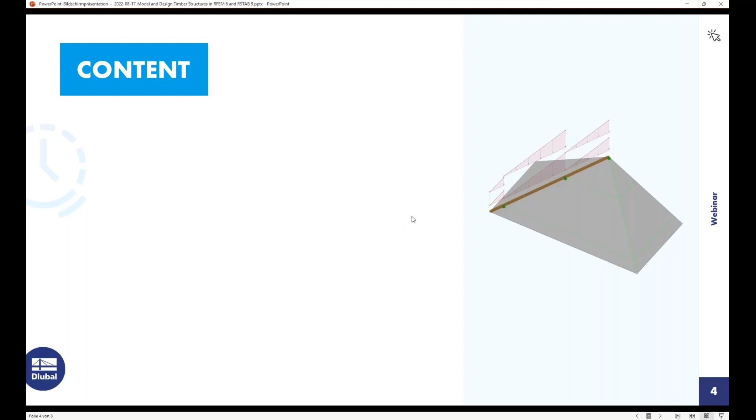But let's go to the agenda today. So we will model a hip rafter for this hip roof, or a part of a hip roof. I will not model the whole roof because of time. But don't get me wrong, I don't want to present you how to design, in this case, a two-span beam with a cantilever.

That's actually not the aim. The aim is, of course, loading. How do we get the loads on this beam, when we talk about the tributary area? That's maybe not so easy, or not so well known, how to get tributary areas for this kind of beam. And that's one big issue.

And of course, we will design the component, in this case the hip rafter. We will spend a bigger focus today on the printout report. In the last webinars, for the design add-ons like steel, concrete, and so on, we did not spend so much time with it. Today I want to spend a bigger focus on it.

So because this was always asked, let's see. The aim is to get a really small documentation with all necessary inputs, without creating hundreds of pages, for example.

The reason I show you topics 1 through 4 is topic 5, which is about parameterization, blocks, and scripting. The aim is to give you an environment where you can use this beam or this kind of beam easily, and repeat the input with parametrization, entering just a few values like length and inclination, to get results really quick. This is the big aim.

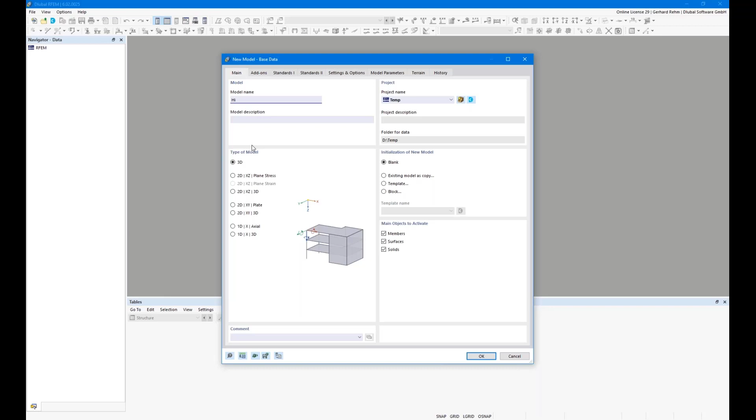And I will activate the add-on Timber Design. I don't need the load wizard because I will apply the loads manually. We can select the standards. In this case, I select Eurocode 0 plus the SLS combinations for timber.

I'll leave it for the global Eurocode, but of course you have plenty of national annexes as well. We'll leave it with the global Eurocode. That's actually all for now, and then let's create this hip rafter.

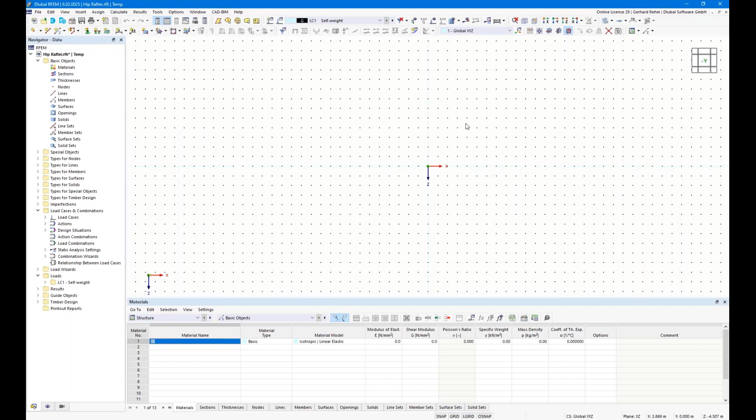All right, so the normal roof should have an inclination of 30 degrees, and let's create the beam. I use this tool, length and direction, and select this line with a length of 10 meters. I need to change this angle to 120 degrees to get an inclination of 30 degrees. All right, here we go.

Now I need to create a cantilever and the spans in between, so I will divide this line. You see there is already a shortcut for this option defined. You can define shortcuts under View, Customize Menu and Toolbars, find the correct tool, and apply the shortcut by double-clicking it.

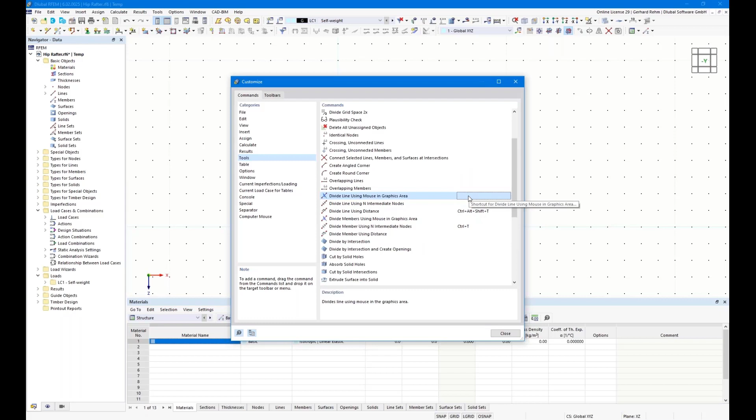I hit my shortcut for it, and I will divide it for the cantilever by 0.8 meters, with a true length or projected length of 0.8 meters. Again, the half length or half width of the building should be 6 meters, so I will enter 6 meters here.

I will add another purlin, the same as we see here on the screen. So we have a purlin here on the bottom, or a ring beam for example, and here we will have another purlin, or maybe walls. It depends on the construction, of course. So I will divide the line again at 3.50 meters.

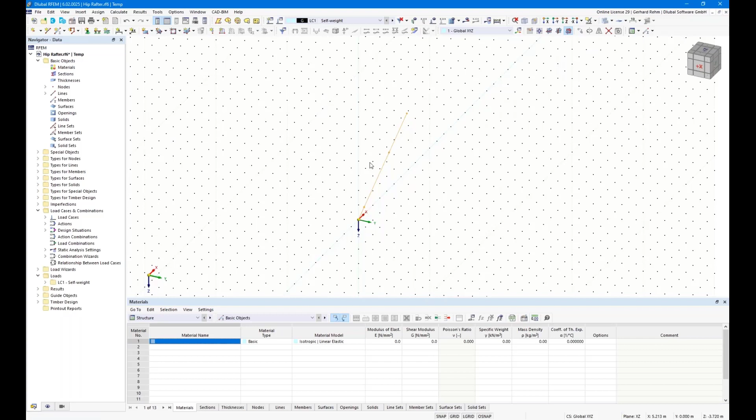All right, so that's it for one roof side. Now I will create this hip rafter. We choose the same inclination on both roof sides, so in this case it's easy. There are more options to create this hip rafter, but I can only show one.

Let's create a copy at a distance of 10 meters. I use this option, step links, and can directly add lines in between the nodes. I will rotate it by 90 degrees, or minus 90 degrees, around the apex, and copy and move these lines by minus 10 meters.

That's it actually. Now I will use the connect tool, which is over here, and connect all the lines. I can delete the unnecessary lines and nodes again. Switch off the grid, and now you can directly draw this line, which represents the hip rafter.

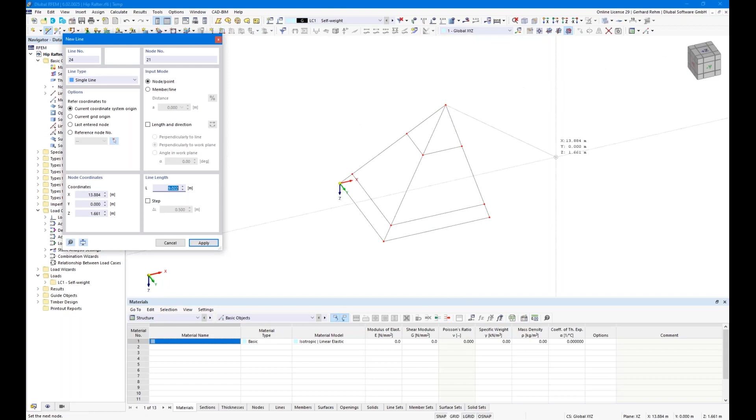All right, we will mirror everything. The mirror plane is in the YZ direction, in the YZ plane, and point B is exactly here in the apex. So we don't need this line, this line, and this line, and also not the nodes, so I will delete them.

Okay, so let's define the rafter. We can use the tool here, create new single member, or we can just select the lines, and I will activate the member option, and now I can assign a cross section and a material. Let's start with the cross section.

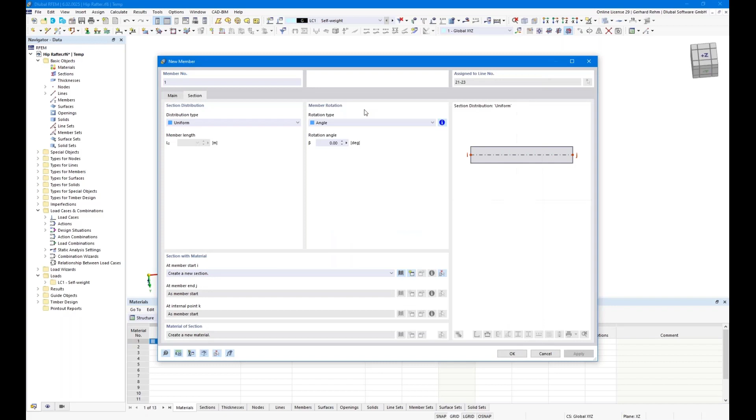In this case, the minimum height of the hip rafter depends on the jack rafters. Let's say the jack rafters have a height of 20 centimeters, and because of the inclination of 30 degrees, it's 20 divided by cosine 30 degrees, so the minimum height is at least 23 centimeters. Let's start with 24 centimeters height. But of course this is not the full truth.

When you think about some notches like the bird's mouth cut, or the cuts on the top side, there are also different sections here on the bottom, but we will come to this later. First we start with a simple rectangular beam.

All right, so let's start with 100 by 240, and let's assign a material. In this case you can use the filter, or just enter your material directly in this search function. I can select this material GL24H according to EN 14080. All right, so that's it so far.

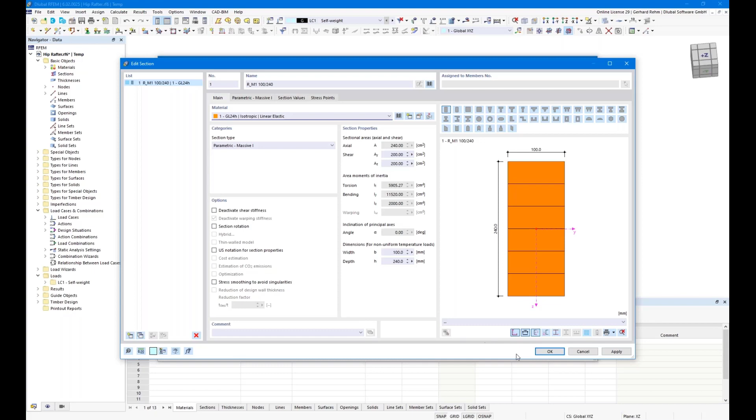I just hit the OK button, and now I have this beam. I don't want to have the beam also here because it's symmetric. I just added this to the structure to show you what is possible with the loads and so on for later. Then of course we have the beam, we need support.

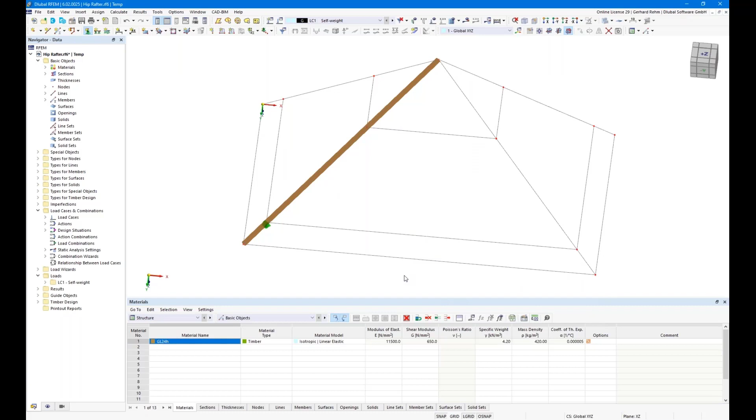So I create just two nodal supports. Of course I need to rotate the supports by minus 45 degrees in this example. So I fix the support on the bottom and a sliding support here on the top side. New one: minus 45 degrees, and it should be sliding in the X direction.

So here we go, we have the model. And now we need the loads, and that's the question now: how do we get the loads on this hip rafter without modeling each jack rafter. That's the aim in this example.

Of course I can add the jack rafters, but then I need to take care of the restraints here on the bottom side. The full load in this case should go to the hip rafter for the design, and if I apply a fixed support here, maybe there is a restraint, and then the hip rafter will not get the full load.

And of course, it's more complicated and time consuming to create all these jack rafters and so on. I want to show you an example today of how it works without that.

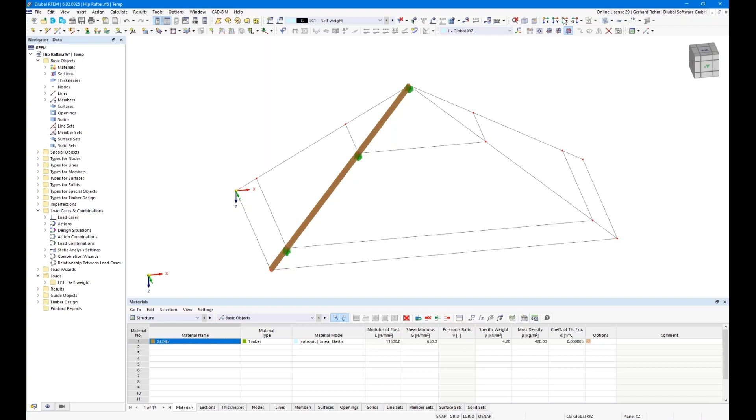Let's create a screenshot first, and let's talk about the tributary area for this hip rafter. When we think about the classic hand calculation, how we did it in the past or how we still do it, we have to think about what is the tributary area.

Let's focus here on this second span. I'll create a copy of this, and I have these two points or nodes here, which is exactly in the middle. So it's just geometrically, we have no continuous effect, it's just the basic. How do we get it? We get it by dividing by 50% of the span length.

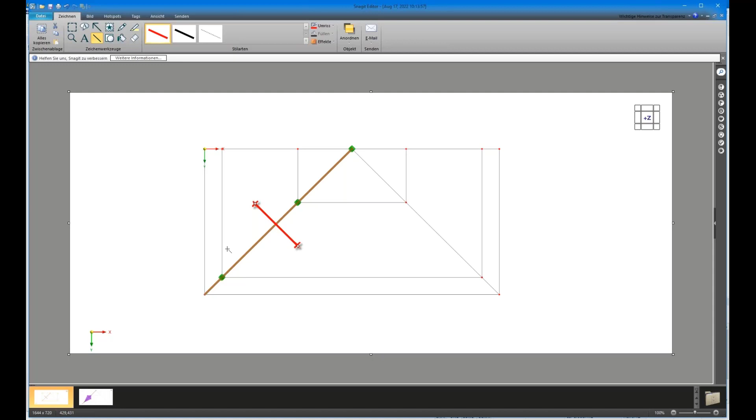But of course, I don't want to do this always manually by hand, by measuring something. This should be done automatically in the software, and I will show you how to do this. So the question is only how.

Maybe you know about this option, which was also available in RFEM 5: member loads from area load. Maybe we can check this out. What we need to do is define a load magnitude in kilonewton per square meter, define a plane, and load members. But of course, I don't have members here because the whole load should not be covered only by the hip rafter. It should also be covered by the purlins or walls. And it's only possible for members.

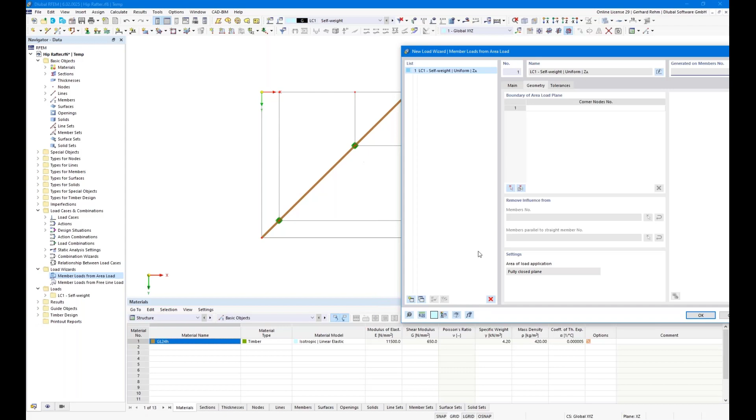Of course I could create here a kind of pseudo member to get the correct distribution. But another disadvantage with this member load from area is that it's actually an isotropic load distribution. So we don't have the option to say the load should be distributed in global X direction. This is not possible with this option.

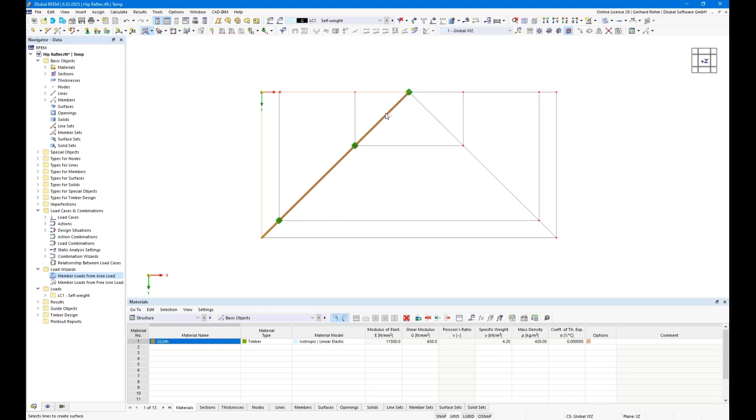So in this case, I have a better option. I create a new surface, and here we have a new surface type called load transfer. What I will do is create this surface now. All right, so now you see we have this surface.

Maybe I will create directly all the others too. Now, where's...

Andreas, is there something? Yeah, we lost a little bit, we lost some seconds. We couldn't hear you, but now it seems to be okay. Oh, sorry, should I repeat something or just continue? Maybe the last two sentences for security. We didn't hear something. Okay, I'm sorry, maybe for 20 seconds also. Okay, good. Thanks for the information.

So we are looking to apply the loads here in Y direction. That's why we check the axis system, and here we have the option to define the load transfer direction. In this case, I want to transfer it in Y direction. Just click OK, and now let's apply a load.

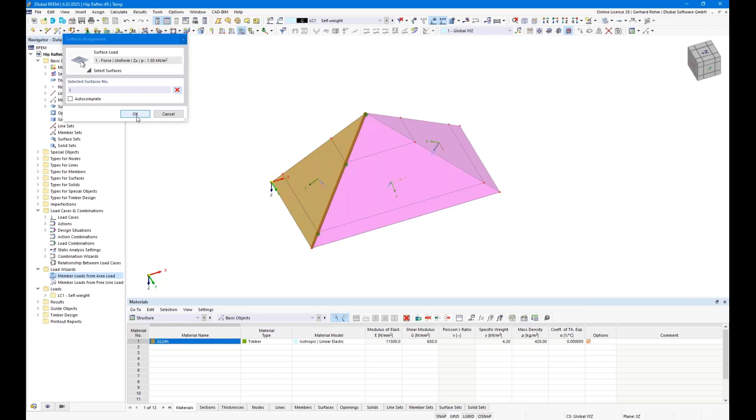You see here our area load, nothing special, but you can check the load directly on the beam as well by right-clicking the surface and selecting display load transfer separately. Now you can see how the load is distributed here. It's constant over the element, but you can change this easily.

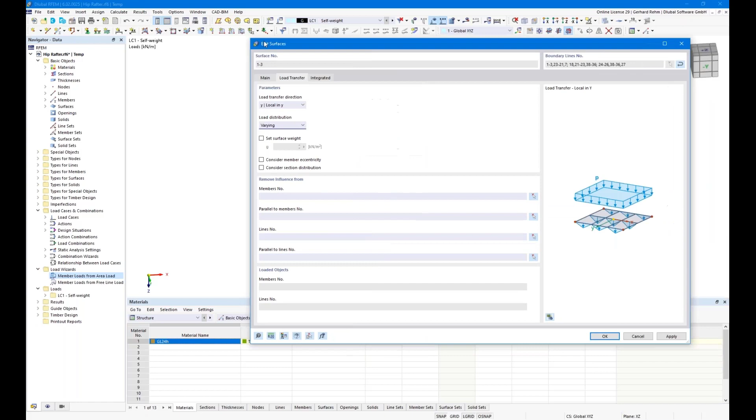Just go again to load transfer and switch this to varying. This will also be the new default setting in the future version, available I guess next week, so varying becomes the default instead of uniform. Just click OK and you see, perfect - it is exactly as expected, but there is no load here on the purlins or on the walls.

Right now the hip rafter is covering the whole load from the whole surface, which is of course not the truth. But how to apply the load also on these lines? When we check the load transfer surface, you see the loaded objects can be members or lines, and that's the big advantage compared to the member loads from area load option. But you see there is no load, and that's clear because there is no stiffness defined on these lines.

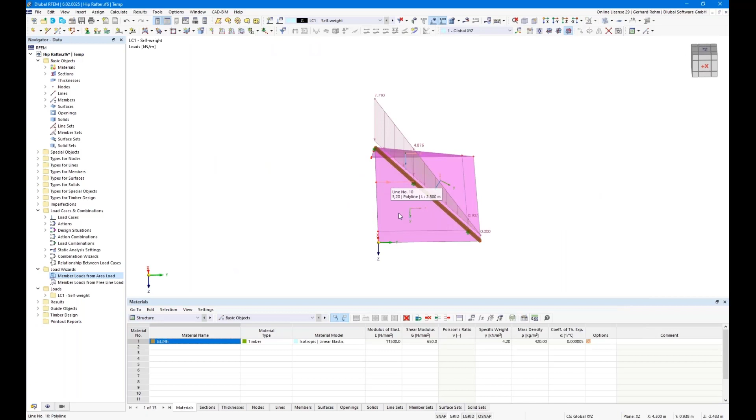So either define a member or just define a line support. Let's do this and you will see directly what's going on. When you apply the line supports, it's directly changing the load distribution as well for the hip rafter. And this is exactly what we are looking for. Also the distribution on the rafter looks really nice, and as I expect.

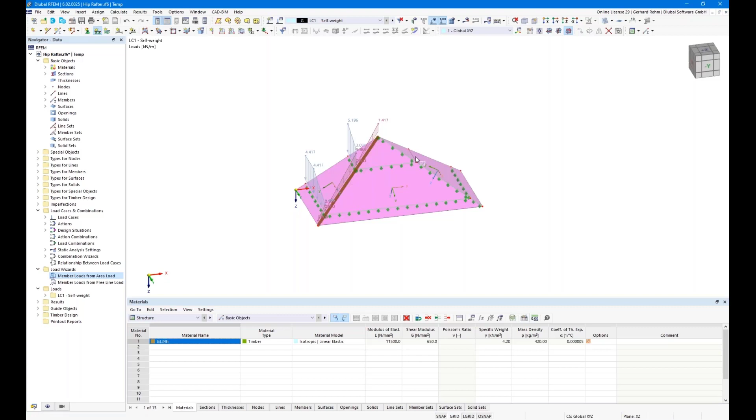We will do the same also on the other surfaces. I need to define a line support everywhere where we have a stiffness. Okay, and now we can apply the load. It's 1.5 kilonewton, I guess we have it already here. Just add 2 and 3.

And that's it. So the big advantage here is you will get directly the loads here on this wall for the further design, or for example, for the purlin. Of course, you can delete the line support here and apply directly another beam and connect it with a hinge, for example, to consider the purlin. You can also consider a column underneath. That's also possible. But of course, for today's presentation, I will just focus on this hip rafter.

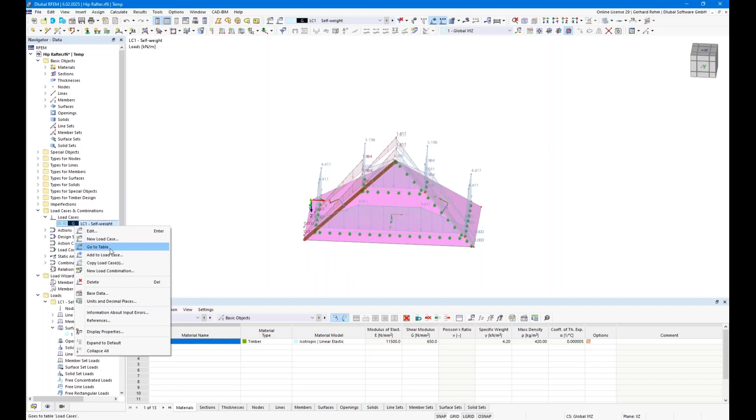All right, so we have defined the loads for load case 1, self weight, and we will create another load case. So I will just copy the load case, copy load case, and let's apply a snow load.

I will deactivate, of course, the self weight, and I will define snow here. Action categories should be snow, less than 1,000 meters. Okay, that's all. So you see directly, depending on the action category, the load duration is set automatically.

We will skip wind loads and so on. It would be too time consuming now, but it's the same. You apply not a global load; in this case, you apply local loads. That's also possible.

All right, then let's go through the load combinatorics. Of course, we have the design situations for ULS and for SLS, and the result of the design situation. Maybe we can select all of them and switch this from second order, from P-delta, to first order, meaning geometrically linear analysis, which is enough in my example.

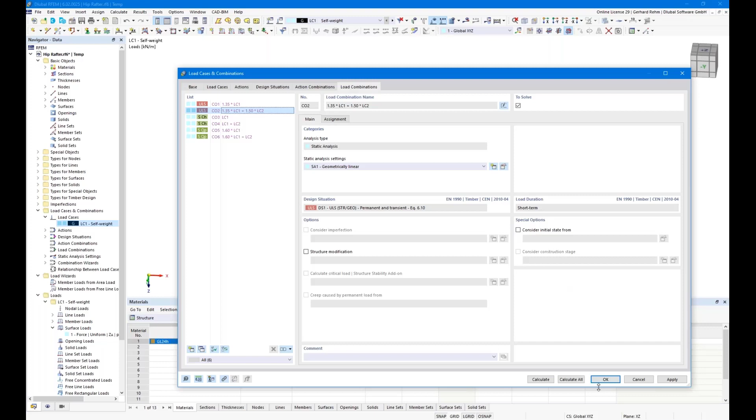Okay, so let's check the load combination. Of course, we get all relevant load combinations, and the related load duration as well for each load combination. Okay, so far for the load combination, and let's focus actually only on this hip rafter.

So I will create a visibility, and I will define some parameters for the design. So we finished with the loading, so now we can focus on the design. So here I have 3 separate members.

I could also model this as 1 member and use intermediate nodes. This is also possible, but in this case, I use 3 separate members, and to bring this back to 1 beam, I create a member set. So we name this hip rafter.

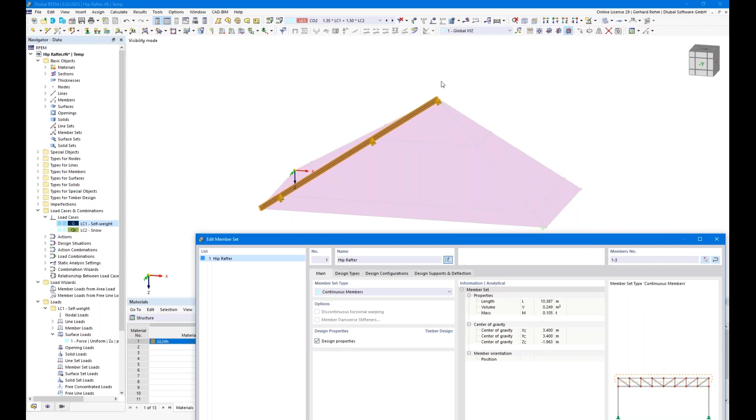And we want to overtake the design properties. So I don't want to have the design properties on each single member. I want to see it on the global, or on the complete member set.

Okay, so let's go to the next tab, design types. So here we define some specific stuff for the design. We have effective lengths. Let's see what's to do here, and let's check it. Okay, so we have to ask ourselves if stability is an issue here in this case.

So when we think about buckling around the Z-axis, we have a lot of jack rafters here, and I can definitely say that buckling around Z-axis is not an issue here, at least when we have jack rafters every 70, 80 centimeters. So I can deactivate buckling around Z-axis.

The same for lateral torsional buckling in this case. There will be no lateral torsional buckling occurring, so it is not controlling in the design, definitely not.

For Y-axis, okay, when you think about the normal forces being really small, I can imagine buckling around Y-axis is also not a big deal, but let's define the parameters for it to show you how it works. Okay, so in this tab you see we have the support types, and we have one support on start and one on the end. This is the default setting.

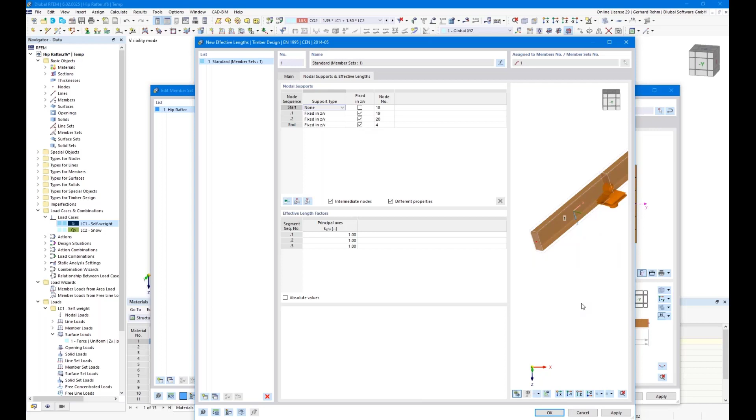But of course, we have these intermediate nodes, so I will insert this intermediate node. So we have 2 intermediate nodes, and we have it fixed in Z direction, around Y direction. But here on the cantilever start, I have no support. So you can see here, these are my buckling lengths. We have one for the cantilever, one for the first span, and another one for the second span.

Which can be modified, of course. For the cantilever, maybe we can set this directly to no buckling, since there will be no compression force in this rafter, in this cantilever. Okay, so that's it so far for the effective lengths for the design. So the next step is about design configurations.

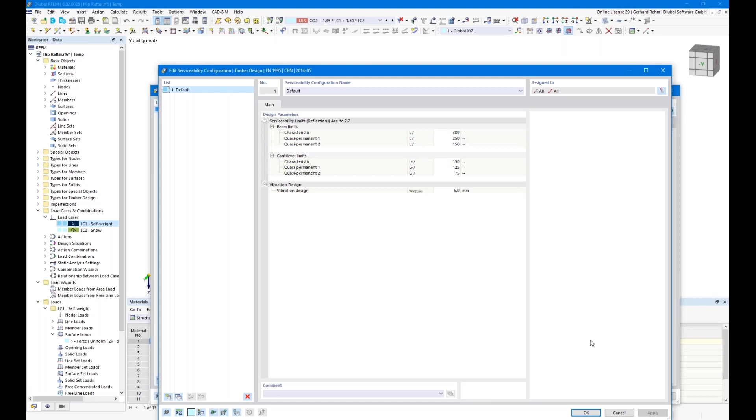Maybe let's have a look inside. Nothing special. Maybe we can neglect some forces, maybe as a result of P delta analysis. We want to ignore some internal forces. This can be set here, or some additional setting which I don't want to explain in detail now. The same for the SLS. Here we have our limits defined, L over 300 for characteristic, and so on. Okay, fire is the same, but we don't focus on fire today.

Okay, so the next tab is important for serviceability. As you can see here, we need a reference length for the serviceability. The reference length should be, of course, per span. As you can see here now, we have only one span. So if we would leave this as it is, it would consider the whole length of the beam as reference length. In this case, it's 10 meter 38 over 300, for example. This is, of course, not the wished behavior.

How can we control this? We can control it by using these design supports. So maybe just hit the F1 button, and then the manual is loaded, and you will see here what is actually the function of a design support. The first function is the definition of boundary conditions for the design pressure perpendicular to the grain direction, which was implemented in RFEM 6, and the segmentation of the members or set of members for the deflection analysis.

Okay, so we need to define design supports to get the segmentation. In this case, for the member set start, which is here, we don't need a support, but for the end, we need one. So I created it here, and you can see we can enter a support length and this KC90 factor for the design check of compression perpendicular to the grain. But I must say it was implemented for this typical straight beam solution.

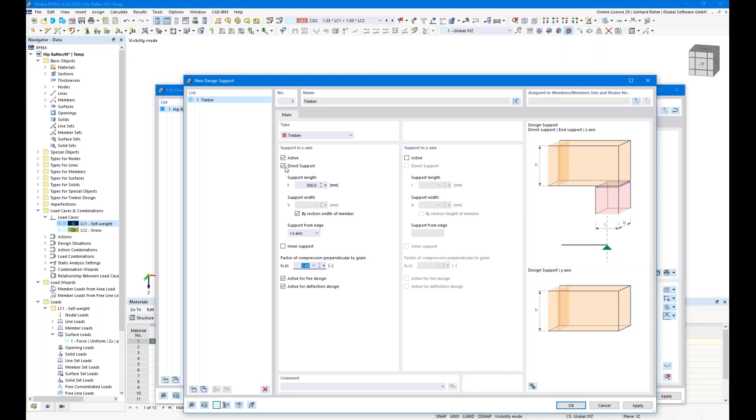When we think about this bird's mouth cut in the cantilever, it is not possible right now to consider this notch. So therefore, we will use the design supports here now only for the serviceability. That's why we set this to direct support, though we have no inputs for that.

Okay, so here we go. We will add this design support also on the intermediate nodes, and we check only the deformation in local z direction. And here you can see our segment length. So we have one segment for the cantilever, the next one for this, and the next one for this. These values are used for determining the reference lengths.

Okay, so that's it so far. Just hit the OK button, and we will also see these design supports here. We can directly deactivate this design support since they are not important anymore for me. Types for members, design supports, and maybe member sets is not important for me. All right.

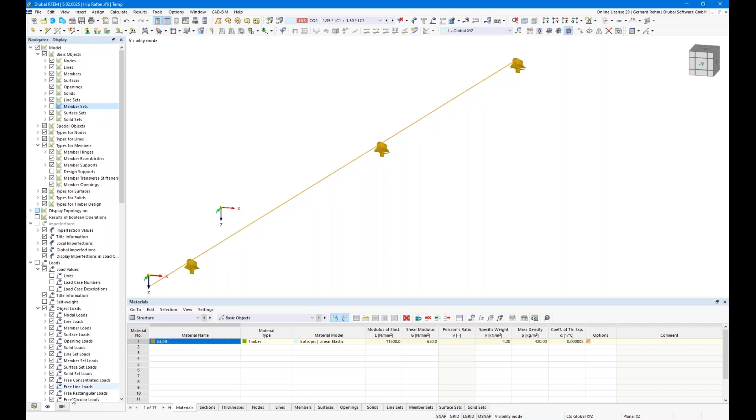Good, that's it actually. Maybe I forgot one thing because of the loads. Of course, I have copied load case 1, which means we need to change the load for snow load. Let's apply 2 kilonewton per square meter, and the load direction should be, of course, projected. All right.

So when we check the loads, do not wonder why the load is here displayed also for snow on the true length of the beam. This is a kind of specialty in these load transfer surfaces. They can only deal with loads and project them in the true length of the beam.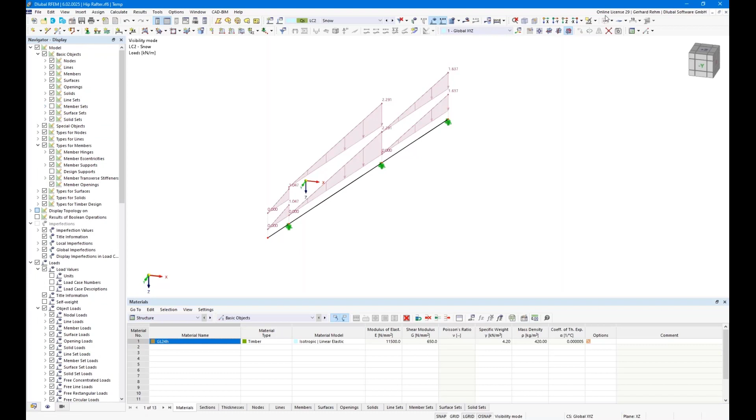So when we check it separately again, wait a minute. Here we go, you see the loads are applied. Sorry, the loads are applied in the projected area, but the internal process converted automatically to the true length. So you must imagine it's a kind of umbrella. When you flip the umbrella, it gathers all raindrops. It does not matter in which direction, whether it's gravity direction, or a kind of mix of gravity and lateral direction.

So the loads are always displayed in the true length direction. Okay, but it's converted correctly, of course.

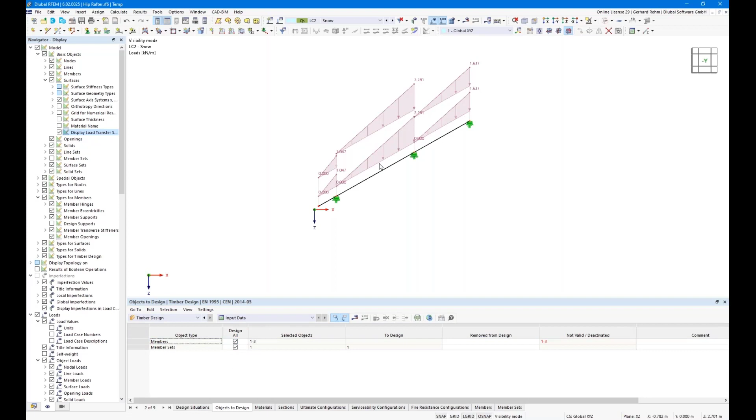Okay, so let's focus on the design. We have defined all parameters for the design. We will check this one, so we want to check ULS and SLS. I want to design not the members because I have no inputs for the members, so I have to activate this option because I want to design the members via the parent member set. Okay, I will deactivate this, and that's actually all for now.

We can directly run the analysis.

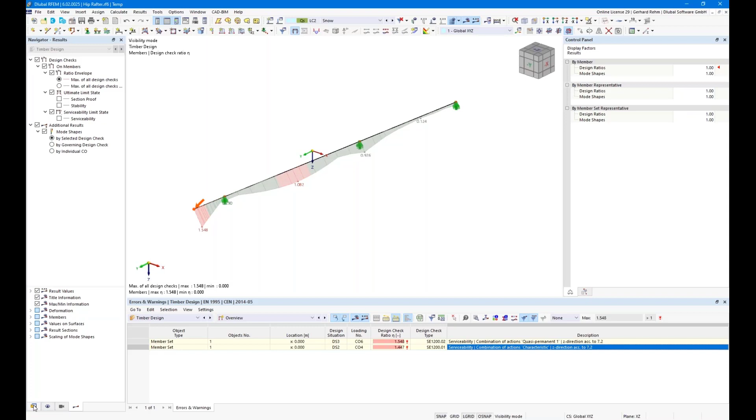But in reality you will not check this deformation on this cantilever. That's why you have the option here, member sets, to deactivate it. When you deactivate this option, no design check is done for the cantilever, and this is the option I want to choose here.

Also, because of the first span, the deformation was a bit too high, so maybe I'll change this to 120 millimeter. So let's run the analysis again. Of course we have changed the cross section, so we need to rerun the analysis for all load cases, or in this case load combinations, and of course the timber design.

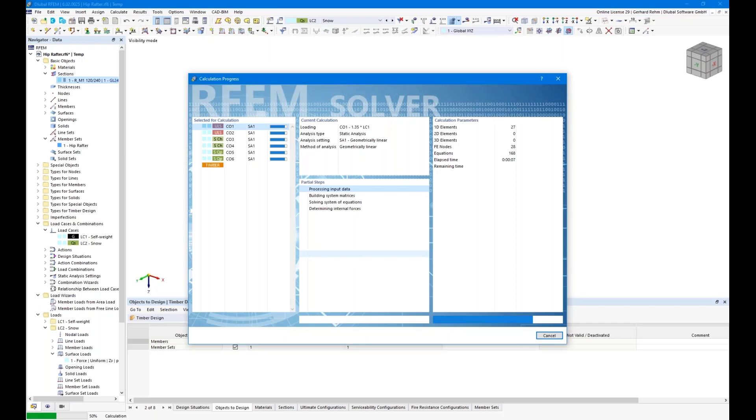All right, perfect, so that's our design. I don't spend time now to present you the internal forces and so on, I guess that's clear to everyone.

Let's have a small look at the design, directly design by member set. Here you can see all designs. There are a few zero values from neglectable internal forces or deformation, but you can define a small filter, show only something bigger than 1%, for example, and then you see all design ratios which are done.

So we have tension inside the beam, we have shear, bending, bending and tension, bending and compression, and we have the stability check. So maybe let's check our buckling factor in this case.

You see the reduction here is not really much, it's from 100% to 86%. But when you compare the compressive stress to the bending stress, it's so small, nearly you can neglect it - it's 10, 20, 40 times smaller than the bending stress.

And of course serviceability, you can check it here separately, or you can overlap both ratios. Yeah, that's possible also. Okay, maybe let's check one design check again.

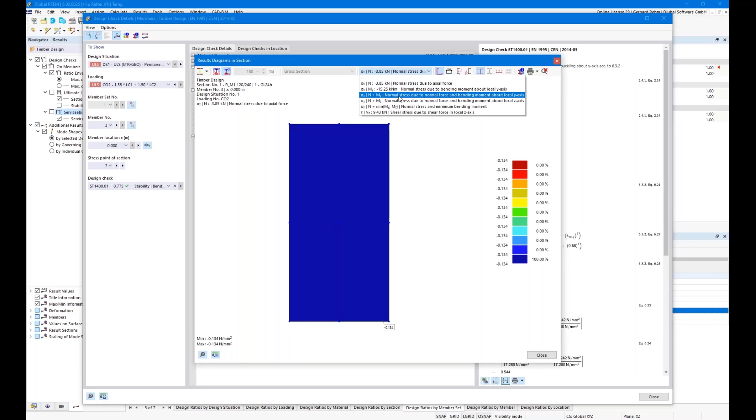Okay, so you can also check here the ratio over the cross section, or you can check the stresses, so for example normal - that means the normal force is also really small.

Okay, so that's it for the design. I mean it's nothing special. If you're interested in more details about the design, I recommend you watch our first webinar - there we spent more time on the results.

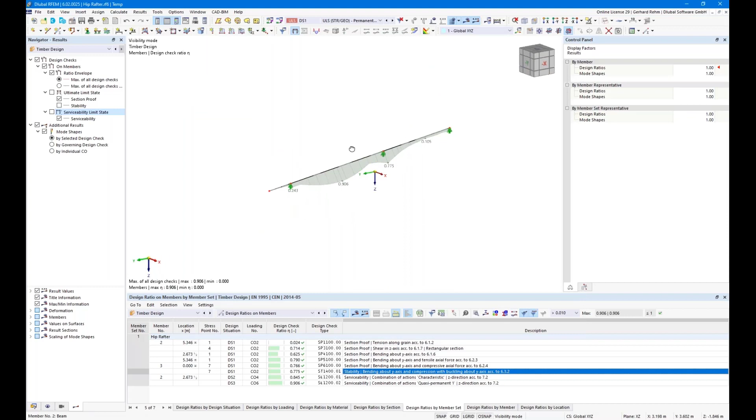Okay, so that's it so far for the design. Let's create a printout report. But before we create the printout report, we want to define a few views to create pictures more easily, and therefore we create a new coordinate system, because right now I'm not able to see the full length properly because it's not in XZ or YZ plane. That's why we create here a new coordinate system.

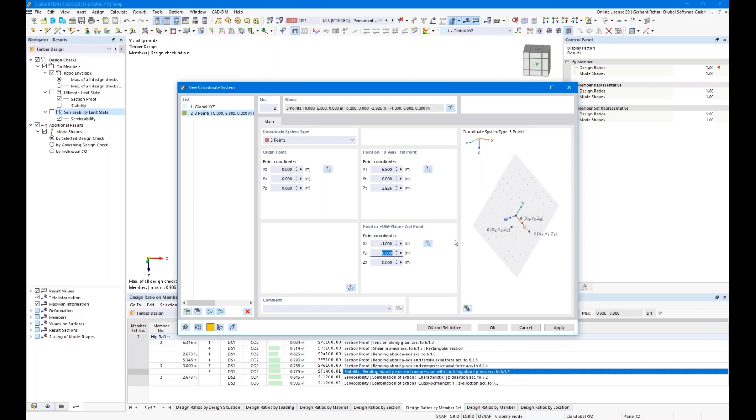So first point is here. The U-axis is defined by this point, and the plane is defined here. We change the coordinates easily, and this one should be in 0 coordinate, okay. And we'll see we have this user-defined coordinate system, and now I'm able to check the view directly in W direction, and that helps me to get the full length.

Let's create a few views. So one view should be the geometry, loads, internal forces, design, for example. This helps me afterwards to create pictures easily for the printout report.

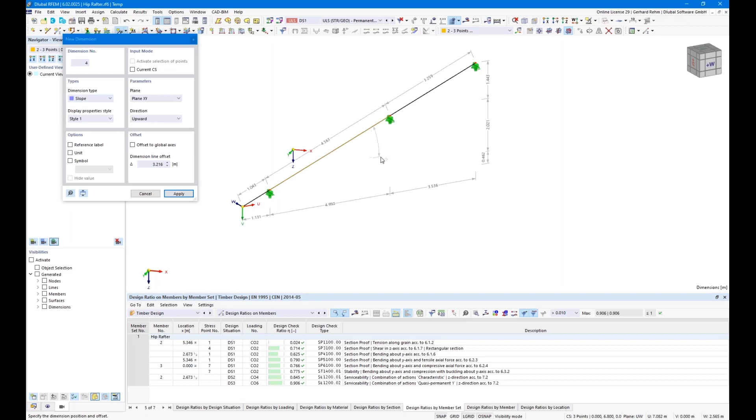So for the geometry, of course, I need a dimensioning. In the current coordinate system, for this rafter here, second plane, and the offset should be 0.5. For projection in U direction, the first plane, and we define 0.5 meters, and the same for the projection in V direction by 0.5 meter. So that's it, we need to define a slope dimensioning. Okay, so that's actually all about the geometry.

We can remove the global axis systems and watch only the U and V. The first view should be the geometry. All right, good. Let's switch off numbering of the members and the nodes.

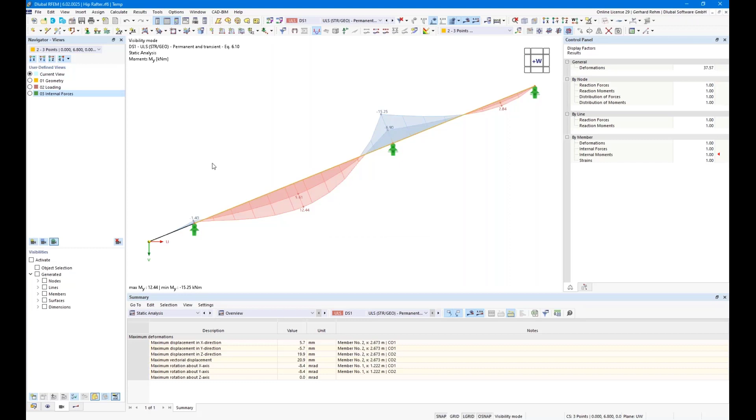Another view. So the second view should be 02 Loading. And the next one should be internal forces. All right, so we check directly here the envelope. So the third view is internal forces. And the last view should be the design ratio for the timber design.

Okay, so now let's check the advantage here of these views. For example, when you cancel the view and you set this setting here, maybe apply the load here, and you want to go back again to this view, you can just hit this button here and you get directly the same view while you created this view. This helps me afterwards to create the pictures and so on.

Okay, so let's start with the printout report. Let's create a new one. And that's the biggest question, which comes always: what setting should I choose here? Of course, without seeing anything, I don't know either. So I just hit the save and show button, and let's check out what the default setting gives us.

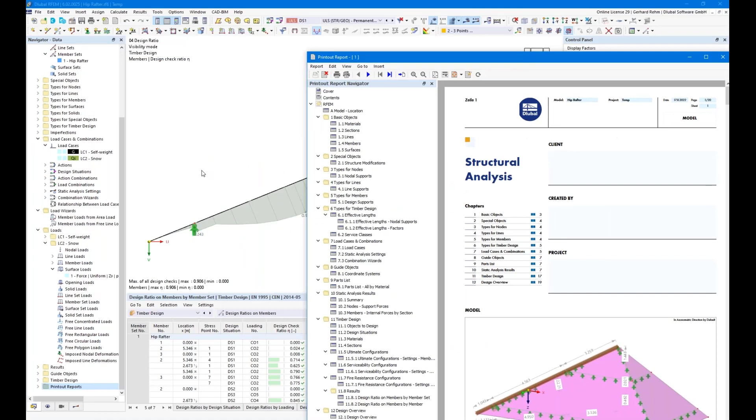Okay, so the big advantage in RFEM 6 is you can have the printout report next to RFEM. So you can work with both windows at the same time. So maybe let's start with removing something or just adding something.

Here you see a model overview. If you don't like it, just right click it, edit it. You will come back to this window here, and you can rotate it. You can define here the window settings. So maybe this should be this size here, and maybe I don't want to see any dimensioning, and just hit OK button, and it will be updated automatically in the printout report.

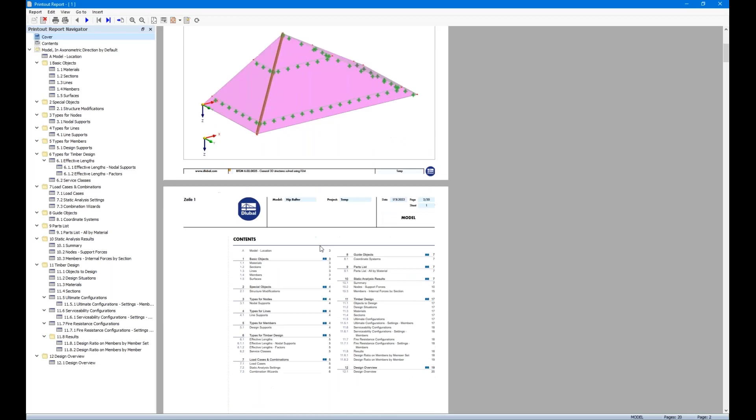Okay, so let's come to the next page. It's about the content. You can activate it or leave it. So it depends on you. But let's start here with the settings, checking both windows at the same time.

And then let's edit the setting, because this window depends on RFEM 6 on the table. Okay, so model location, for example, in the base data, you are able to enter the location of the construction. In this example, I want to switch it off. Materials, okay, materials is interesting. Maybe you can activate the properties or not. I mean, everyone who designs a GL24 should know about the characteristics, but of course you can display the properties, strengths and so on.

Sections, of course, I want to see this in the printout report. When we talk about lines, you see here which line or which nodes are connected with which line, for example. To be honest, I'm not interested in this. The same for members—which line is related to the member? I'm not interested, I will deactivate it. The same for the surfaces. In this case, the surfaces are only for the load transfer, I will deactivate this. The same for the special objects.

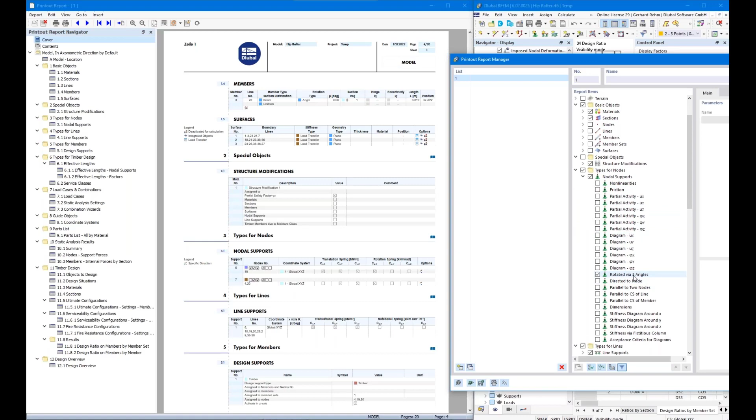Here it shows me, okay, when you analyze according to second order analysis, you need to consider the mean value of the stiffness, but I have a linear analysis, so I will not show this information. Nodal supports are important, of course. In my example I activate this option, rotated via 3 angles, to get also the angle of rotation of the supports. Line supports, I don't need this. Type for members, design supports, I'm not interested in this information. Surface supports, I don't have any surface support, so I can leave it or not, but it does not matter. Okay, effective lengths, of course, I want to see what setting and which effective lengths are defined here, that's why I can leave it.

Okay, so for load cases, let's go down. You see here load case and a few information—okay, self-weight is considered or not. You can leave this as it is, or you can use this reduced description. This reduces everything to one line, which gives me self-weight and if the self-weight is considered and which load duration it has. So let's come to the design situation. I want to see the same in a reduced description. And of course I want to see load combinations as well.

But let me check this. Where are the load combinations? They were switched off, okay, that's why I cannot see it. I want to see the load combinations as well with a reduced description.

Static analysis settings, which solver was used, how many iterations and so on. To be honest, in my opinion, for my case or for my example, it's not important. I will deactivate it, the same for the combination wizard.

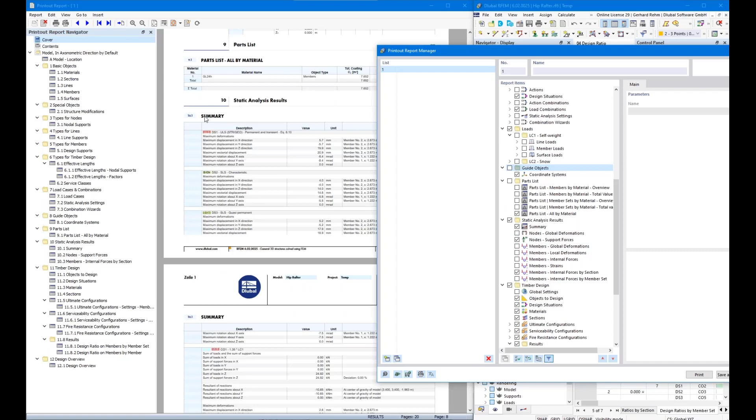Here we see the summary. So for each load combination, we see the summary, the sum of load, the maximum deformation, and so on. For me, it's not important. I will deactivate it. I'm interested in the nodal supports, for example.

But in this case, I will define it only for a specific loading. So it should be for self-weight, snow, and the ULS combinations. That's it.

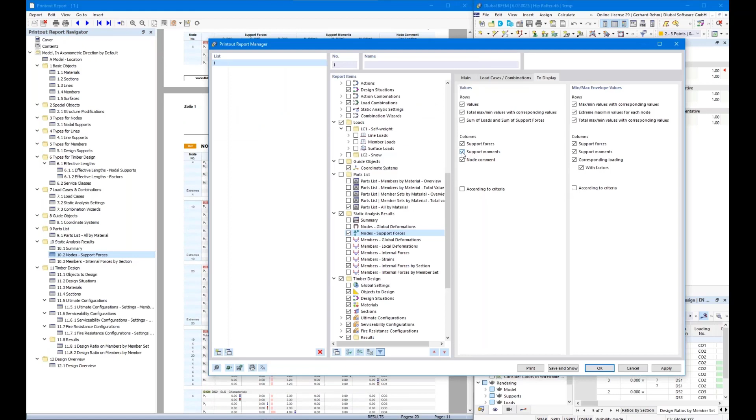And here I want to define some settings because I don't want to see all of these values. So when we go to nodes, yeah, you see the table is really long with a lot of information. I'm just interested in the values, but not in the extreme values here. Okay, so far that's it.

Then let's go to the internal forces by section. In this case, I want to see the member internal forces by member sets. Again, for the loading, but of course not for all loading, only for the design situation 1.

All right, and I will define also here some settings. I don't want to see these values and this and this because this is the envelope. I want to see only the extreme ones. Yeah, this helps me to reduce the table much.

All right, okay, that's it so far for RFEM side. Now let's go to the add-on side. So when we check the add-on, yeah, we will see a few settings here.

Maybe we can skip one of those, but the same for the materials, because the materials we have already here in the basic objects, but let's leave it. Ultimate config, we can deactivate, in my opinion it's not necessary to show, but serviceability config maybe is important to see which limits were used. Okay, we leave this, but fire, we don't have fire, so I will deactivate this directly.

Okay, and I'm interested in the design ratio per member set. And here I will activate as well this design check ratio. I define 1%, then I get only designs which are higher than 1%.

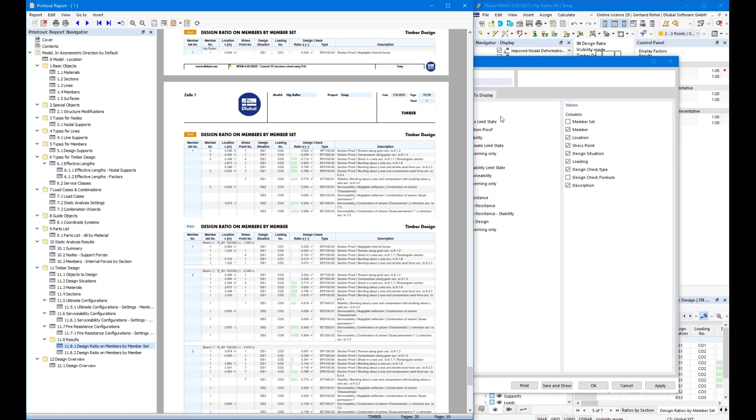And I'm interested not in all this information about which member, which location, which stress point, and so on. So that's why I deactivate all this directly. Loading, maybe yes, yeah, and that's it. Design overview, we can deactivate as well.

Right, let's hit the save and show button and let's see. Before we had around, I guess, 20, 25 pages or something. Now it comes down to 6 pages. And when you see here, yeah, tables were really small and only the important values are listed here.

And yeah, this is actually the aim, to have only a few pages for this rafter and not 20, 30, 40, 50 or more pages. Of course, nobody reads this.

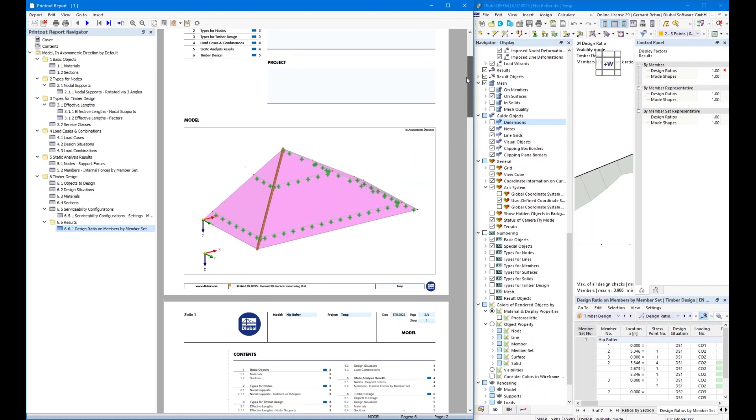Of course, you can reduce pages here as well. So for example, this page or the content can be removed, then you have 4 pages, and maybe you will find a way to reduce it to 3 pages. Yeah, but of course we need pictures.

And now let's create these pictures, and that's why I created the views. So I hit this button here, geometry, and now I will print it to the printout report. So here we go, we have this live preview, so you can activate or deactivate it. So when you deactivate it, the input is a bit quicker.

So here I use a name geometry, and it should be window filling, and the height should be only 33% of the page. So when you hit the button again, you will get a preview. All right, that's it, I just hit the OK button.

And I go to loading and print this picture as well into the printout report. So this is loads, load case 1. And the same for load case 2.

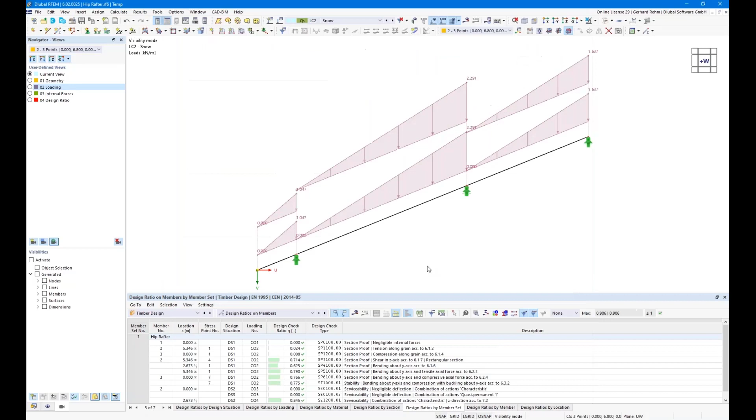All right, now let's talk about internal forces. In this case, I draw a picture-in-picture graphic by printing more pictures in one picture. So I create a few new windows, in this case 3.

Let's check it horizontally. The first one should be the normal force, the second should be the shear force, and the third one should be the bending moment. All right, let's print this picture.

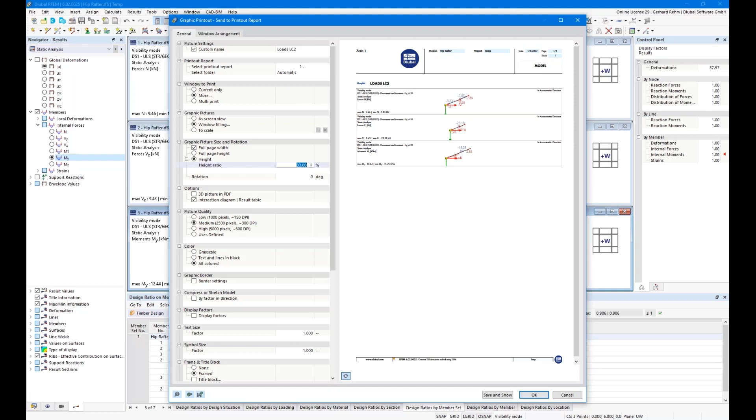I select the option 'more', but not with 33%, let's say 70%. Here we go, and one more picture about the design ratio. So let's switch this back to 33%. That's enough.

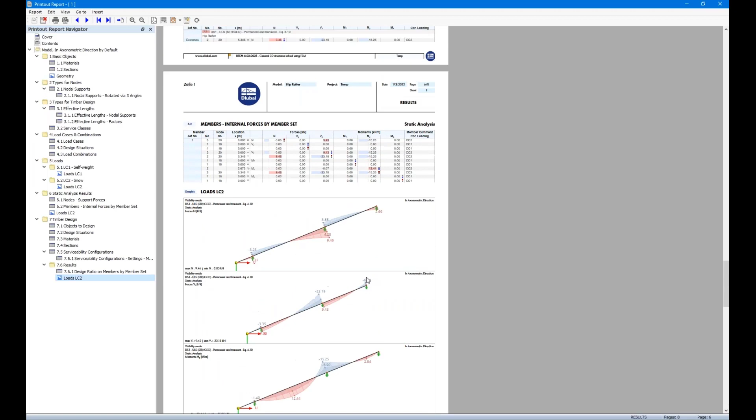Okay, let's go back to the printout report. Now you see 8 pages. We see the pictures—oh sorry, I forgot to rename them. This should be called internal forces and this should be design ratio. But for now, it's okay. So you see here we have 8 pages, and we have a nice clear printout report created with, in my opinion, all necessary information.

So that's it so far for the printout report. Of course, in this printout report manager, you can create templates, save it, and use it in another file, or just open this file again, change the parameters or change the length of the beams and so on.

And that brings me to the next topic, number 5: parametrization and scripting. Of course, if you do this part really often—if you have frequent checks for hip rafters or different kinds of beams—I don't want to model everything the same way I did in the last 50 minutes. That's why you can use different options.

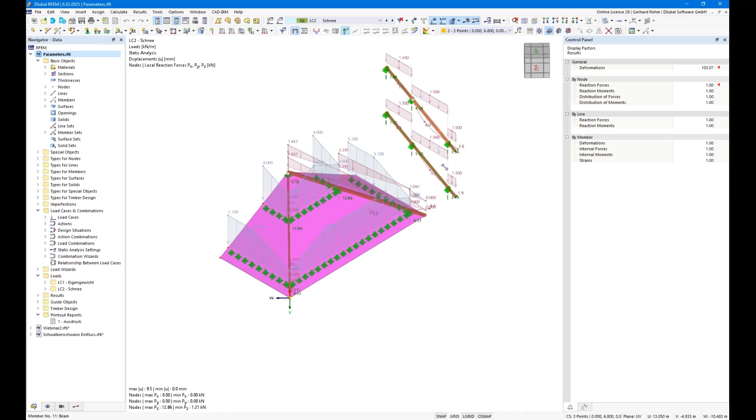I prepared everything already here since I have no time to do this in real time. So here we have this structure—it's the same structure, but only with 2 hip rafters modeled, and also the rafters here I have modeled. This model works with parameters.

When we check it here, I have parameters defined, and each parameter is connected to a node coordinate. So you see this yellow corner, and when you check the formula, you see we use these parameters—cantilever plus purlin—to get this coordinate of 4.3 meters.

So cantilever plus, what was it? I can't remember—plus purlin is exactly 3.5 plus 0.8. And the big advantage now is I can change the parameters easily. Maybe let's check this printout report first to see the difference between before and after I change parameters.

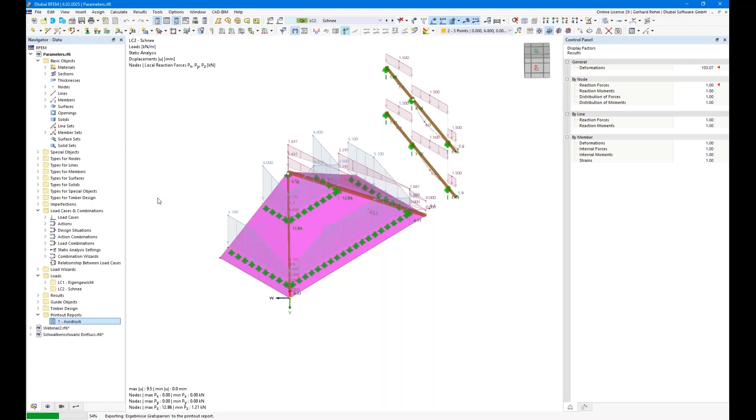All right, so maybe let's check the geometry. This is this picture here—it's about the hip rafter and the rafters, the dimensioning and so on. Maybe I can bring this next to this. Here we go.

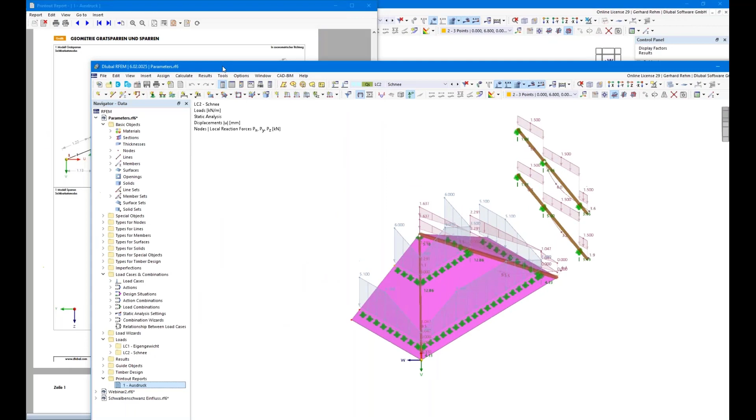Let's remove this one here, and this one. Of course, it's a big advantage if you have a second monitor, because with one monitor it's really too small. Okay, so let's open the parameters again. So when you finish with all these parameters, you're able to change this.

So I may create an extreme example. Let's say 8 meters, and the slope should be 45 degrees. The purlin should be located at 2.5 meters, and the cantilever is, for example, 2 meters—also for dimensions and for the spacing, which is related to the load on the rafter.

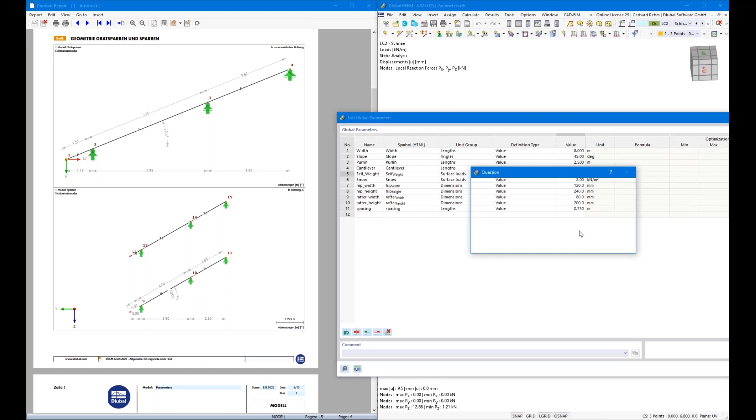Okay, and when I hit the OK button, you see the geometry will be changed automatically. Sorry, this was not my aim—this switched automatically to the next example. So yeah, here we go.

You see the inclination was changed to 45 degrees and the length was changed to 8 meters. Now we can simply update our print report. Hit this update button, and we get all information automatically into this printout report without creating a new printout report, without modeling something. It's just about checking the dimension of the hip rafter—if the design ratio is still okay, or if not, optimize the cross section, and then reprint everything.

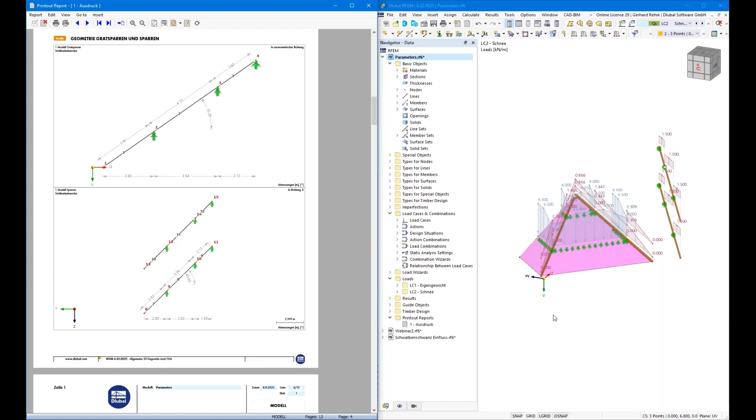All right, maybe let's close the printout report and come to the next topic. It's about parametrization as well, but it's about scripting. Unfortunately I cannot spend so much time now on scripting, but we did a webinar a few weeks ago about scripting—you can find it on our website. But what is the big advantage here for the scripting tool?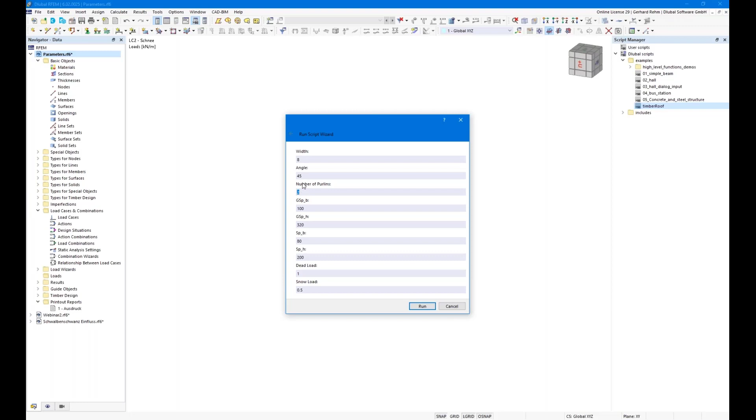I have prepared a script, so let's delete all of this and run the script. It's exactly the same as what I prepared in the last 50 minutes, but here I can easily define the parameters—for example, again 8, 45, and number of purlins. I have the option to program with JavaScript how many purlins I want to use, for example only 1 on the bottom side. When you hit the run button, the script runs, and you get the geometry with only 1 purlin.

If you run the script again, for example, with two purlins, you will get an intermediate support here. So this is all possible, of course it needs a bit more experience with programming. But if you're interested, please follow the scripting webinar we did a couple weeks ago.

Of course, you can save blocks. We have here this block manager. I believe it's also shown in the scripting webinar, but you can save structures as blocks and load the blocks as well. That's also possible, but I'll skip this part for now. You see there are already a few blocks defined, but not for now.

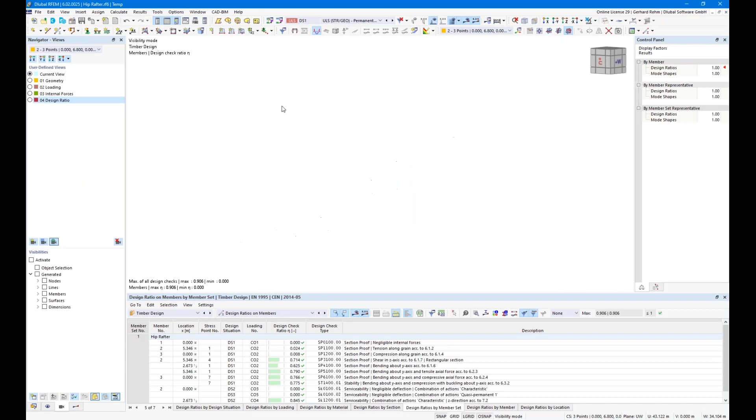Okay, let's go back to the hip rafter again. As you remember, maybe from my previous example, this one. So as you know, we've defined here a rectangular section for this cross section. Let's check this out.

Of course, we have some cuts here on the top side for this hip rafter, and some bird's mouth cuts on the bottom side. We need to consider this in the design. You can calculate on the safe side with the netto section, but that's why we've implemented these typical timber cross sections. So in this case you can directly start with this typical hip rafter section. Also for the valley rafter it should be available, and even when it's cut on both sides.

But when we think about connections, how to connect the beams to the hip rafter - where I live it's really typical to use dovetail connectors, because you don't need an additional fastener. Of course you'll apply fully threaded screws, that's clear for uplifting forces, but it's an easier way. But you will create an additional notch, so another cross-section reduction which needs to be considered.

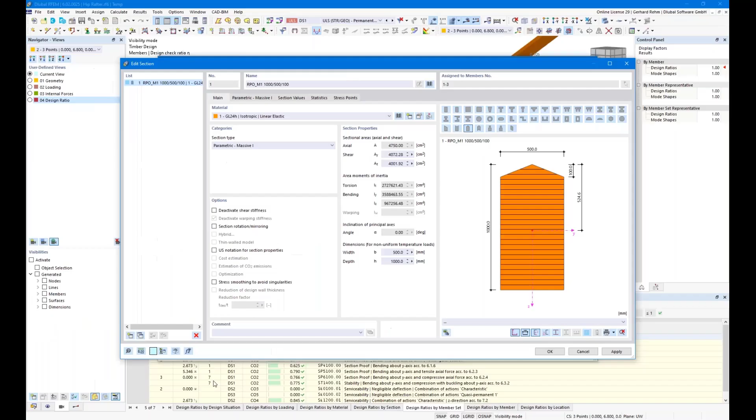So the question now is only whether we need to consider this reduction for the stiffness as well - for the design side, of course we need to consider the reduction. When you imagine you have this bird's mouth cut, and also a jack rafter connected at the same location, that's an extreme example, and in this case we need to consider the netto cross section.

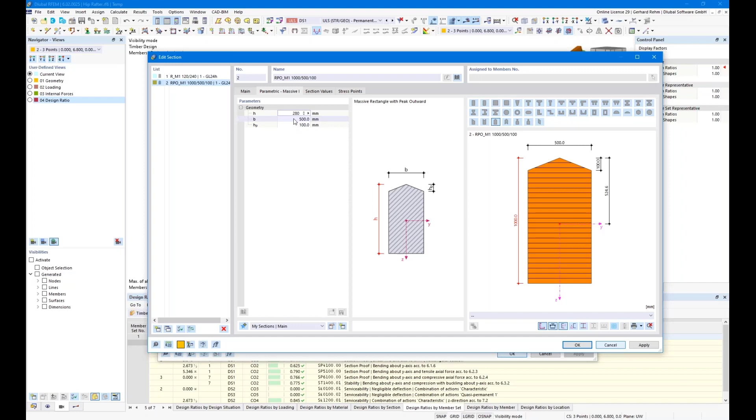Let's create one example here quickly - you should have time for it. Here we'll change this to 200, maybe 280, the width was 120, and this one should be 35 millimeters. Of course you need to calculate the correct angle and then the correct height of this reduction. Okay, so let's change this.

Here we go. So now the question comes up: what about the stiffness? Is the stiffness correct when considering the section without the notches? I've prepared another example here - it's a solid structure which shows the influence of these dovetails. Let's switch off the results and see what we have here.

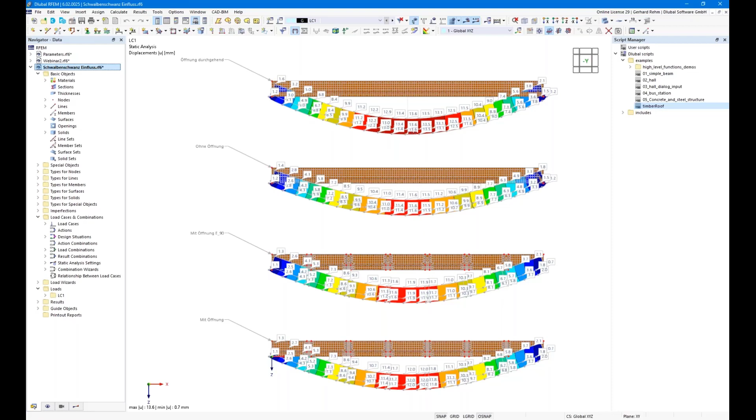So the first beam, checking the X direction, has a notch along the whole length of the beam. The second one is a solid rectangle without any notch. And on the third one, we have notches in between, but this notch is filled with a material with E90 - these materials are defined with an E modulus 90 degrees to the grain direction. The same setup here, but without any parts inside the holes or notches.

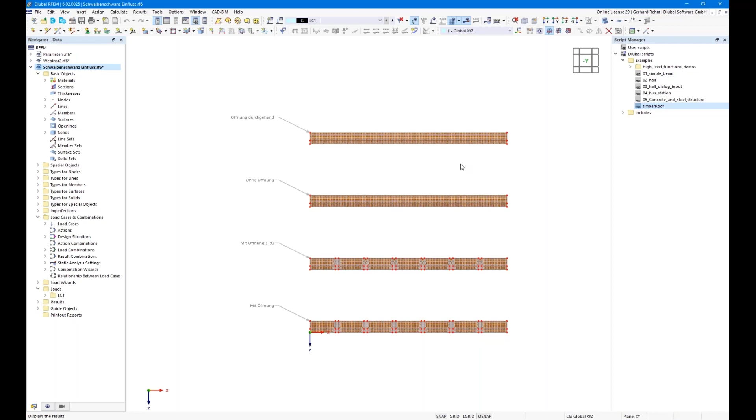So when we check the deformation to check the stiffness for this example, you can see the first one, with the notch along the whole length, is around 13.6 millimeters. Here we have 11.6, and you can see the reduction with the filled section is nearly the same - closer, of course, to the brutto cross section instead of the netto section. So we can consider the brutto cross section for the stiffness, but for the design we need to use the netto cross section.

And this is the next topic I want to show you how to do. So the stiffness here is correct, let's say, and let's go to the sections tab for the design. Here you have the option for this hip rafter to use a different section, so you can switch this and define the new cross section with a reduced section. For example, when we think about these dovetail connectors, you can use this one.

Yeah, and here you can just enter everything: 280, this was 120 — let's say 40 just for example. This should be 120 minus 2 times 25 millimeters, which is 70 millimeters, and this should be 16 maybe.

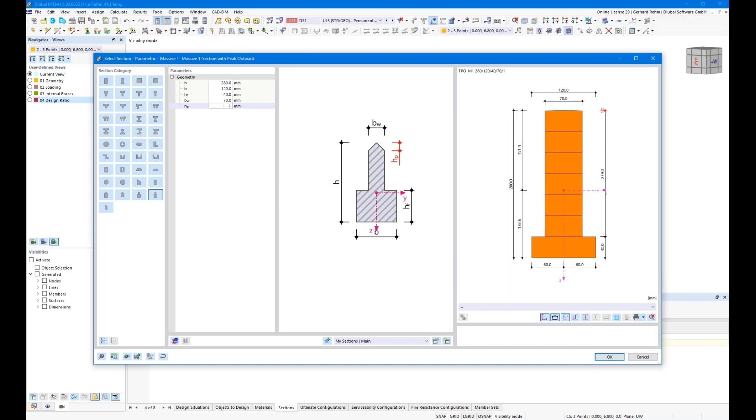I don't know, okay, so you see now you have this cross section, and this is the cross section which is used for the design for the ULS checks only. Of course, when you think about this on the bottom, maybe it's better to neglect this part completely — it will not help so much. So this is one way how to consider these reductions in this hip rafter, or in general, how to consider reductions in beam elements.

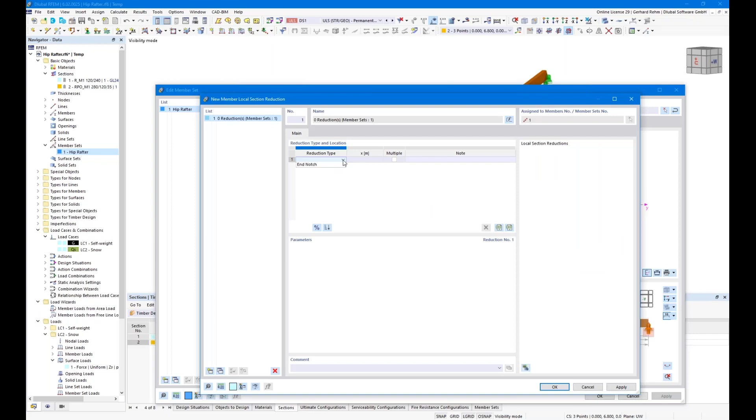For straight or uniform rectangular sections, there's also the possibility here to define some... where is it? Member sets, here we go, to define some local section reductions, but they are based only on rectangular sections, and you can define only a notch along the whole height or width. So that's typical for these notched beams here. That's also possible.

Okay, my last example for today before we finish is another one: the load transfer surface, to show you what is possible. So let's think about this roof here. We have purlins and we have a hip rafter here, another purlin here on this side. And the question is always how to get the loads on it easily.

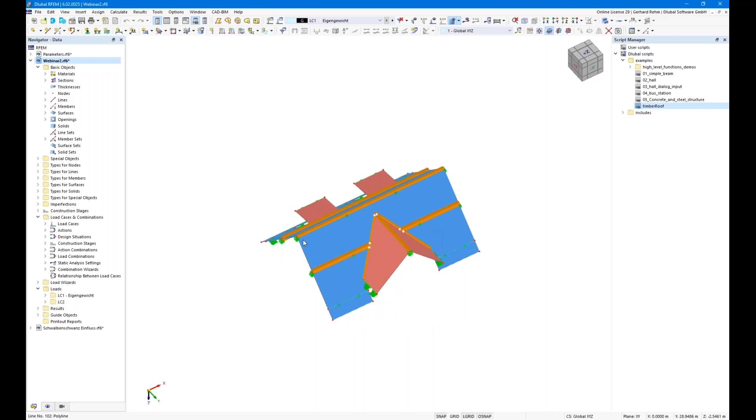Is it on the safe side to design the purlin with the whole load from this rafter, for example, or maybe when this building here is taller, then of course maybe this is design giving, because this gives you a nodal load here, or it gives you a nodal load here in the purlin in the center. So that's always hard to get a good approximation. Maybe the load is too uneconomic, especially for the next parts — maybe there's a column underneath and maybe another beam underneath the column and so on. So maybe the load is then too much, and it would be good to have the real distribution.

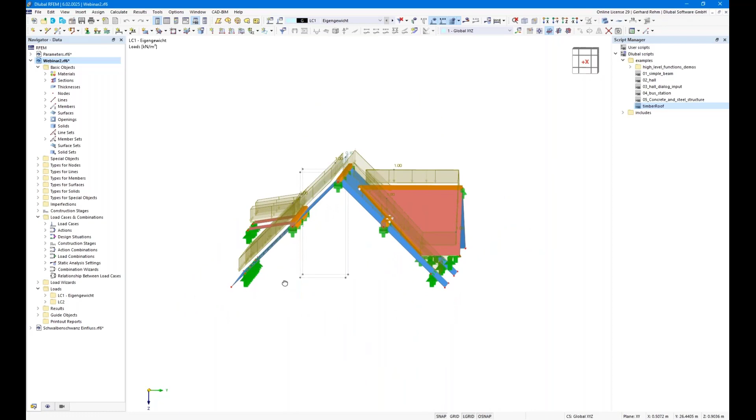Okay, so let's check the loads here. We have created one load case, and here you can see there is a free load as well on this surface, on this part. Let's check the distribution on the beams, and maybe it's better to check only the members. Okay, and now you can see directly the distribution, which looks really good. So we see the reduction here for the purlin on the apex, the reduction because of the hip rafter here, and here we see because of this additional free load, we get more loads on it.

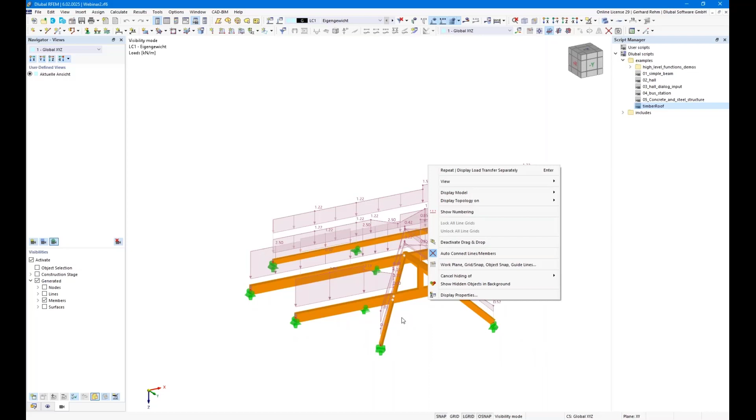And the big advantage here, you can see — I have this semi-rigid support considered here for this hip rafter, because the purlin is not supported here, but here. And this is a kind of, let's say, 2.5D solution. This helps you maybe to determine the loads, and especially when you think about parametrization, you will get the loads quickly, or you will get the designs quickly for this kind of structures. This should give you only an idea of what is possible with this load transfer surface, and this maybe helps you in your daily job.

Okay, so I guess I've considered everything, and that's actually the end of my presentation. If you have any further questions afterwards, feel free to send us an email and we will answer all your questions. Okay, then let's go back to Andreas, and thank you very much for your attention.

Okay, Gerhard, thank you for a nice presentation. We are a little bit over time, but it's quite okay.